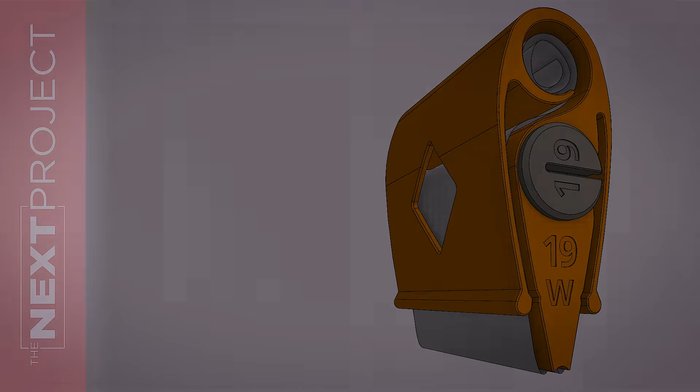This is yet another 3D print tool project. We are again revisiting the grip, which is a polish sanding grip for working on frets that are installed in the guitar or bass neck. This tool has gone through quite an evolution. I released the first version, which was, I believe, version 17.

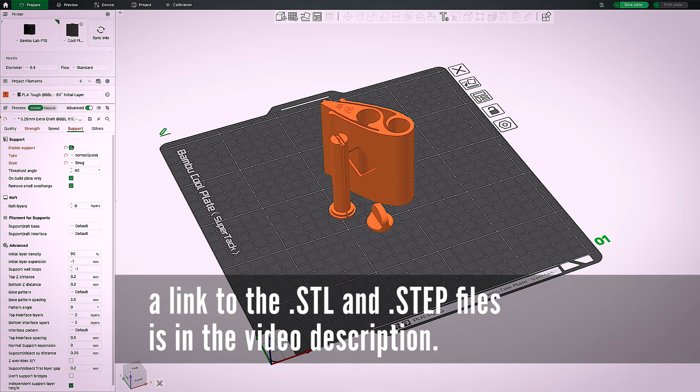It's been going through revisions and testing and a lot of use since then. A lot of people have downloaded it. I've got some very good feedback from the people that have been using it. I appreciate that. This is a group of files that I'm going to be sharing with you yet again.

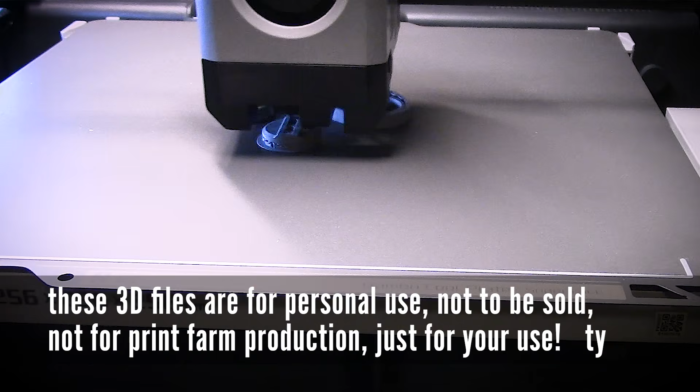This is version 19. I'm going to share a medium wide and extra wide housing version, which is the big bulky part we see getting printed there. There is also a reel or a spool, which is the tall narrow piece, and a thumb knob.

I'll be sharing these as STL and STEP files, and I've decided to also share the slicer code for this. You don't have to use that. You can create your own to fit whatever filament you may be using, but just so people who are new to this have a place to start, it will be in there.

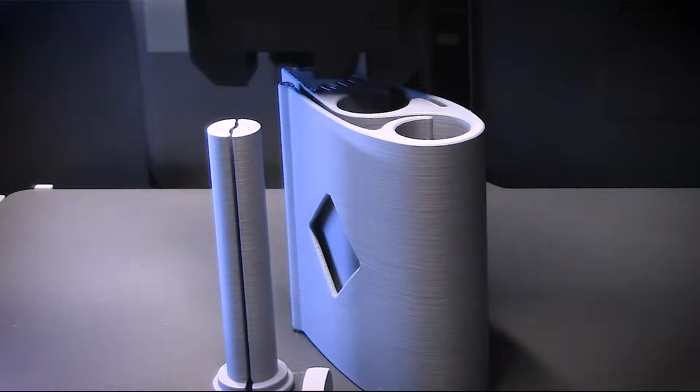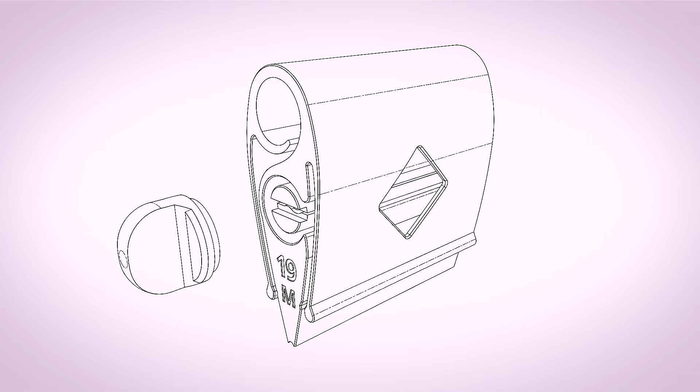Assembly is really pretty easy, just 3 pieces. I add a little bit of super glue to the thumb knob close to the center part where it keys into the spool. So put a little super glue on there, slide the spool through the housing, and then fit the thumb knob into the keyed part of the end of the spool, and squeeze it tightly together. You want the housing to be kind of stiff and snug on the spool assembly. That's it. Pretty easy.

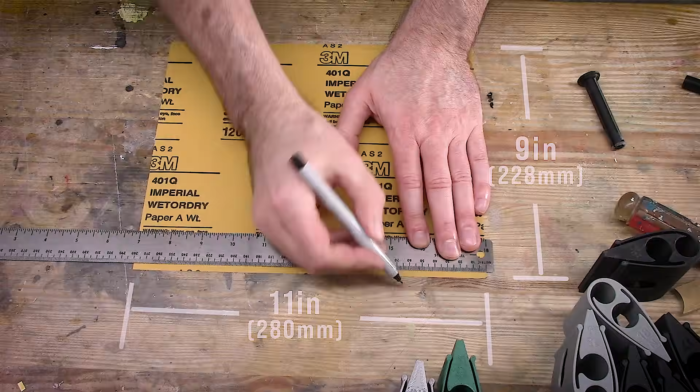Okay, so we're using some sanding pack paper, which is 9 inches by 11 inches, and divided that up using the metric system. I'm getting 5 slices that will work with this sanding grip, 56 millimeters wide each, which is like 2.2 inches roughly, by 9 inches long.

I roll it up with the grit facing in so the backing paper is out. And I fold a little tab about a 1/2 inch wide at one end of the roll that I've just made.

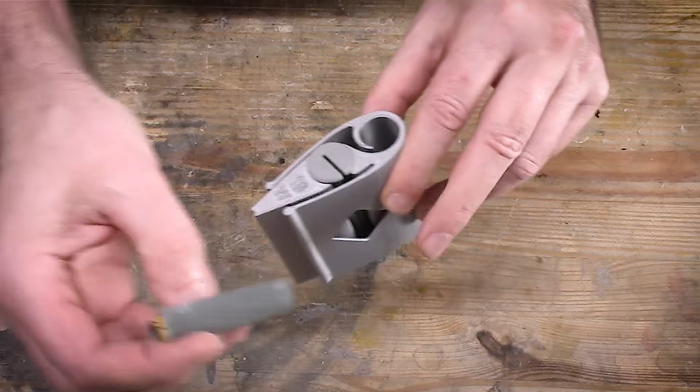So the process is, we take that little folded tab and slide it into the reel or spool, whichever you want to call it. Unroll part of the remainder of the rolled up sandpaper and tuck it into the feed part, the top hole in the housing there. And make sure the tab is tucked in nice into the slit in the spool.

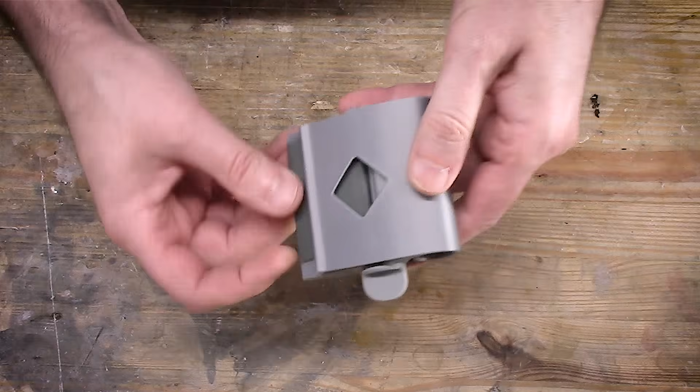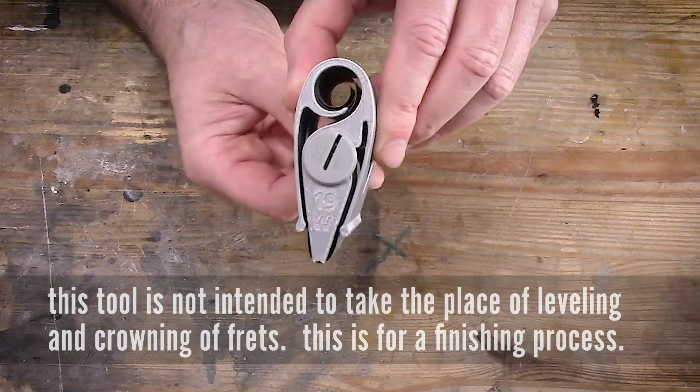And then you use the thumb knob to advance the paper onto the collection reel. That's about the magic of it. You are ready to polish sand some frets. Now, pay attention to which way you need to roll it because you can unroll that tab right out of there. So figure out how to twist it to pull the paper from the top supply roll down around the bottom sanding area and onto the collection reel.

When you're done with all your sanding, you just pull the paper out, reload and use your next grit. Another idea: if you have a little trouble keeping the paper stuck in the reel, try to fold the tab over to create kind of a V double fold at the very end before you slide it into the reel. This may give especially lighter grit sandpapers a little more grip within the reel.

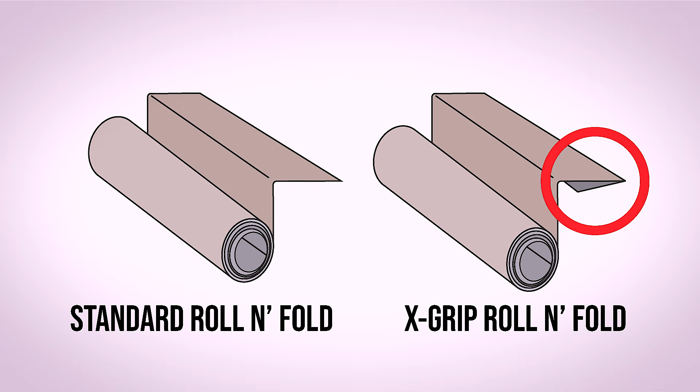This is another version of this. This has a different thumb hole. You see that has the oval holes where my thumb is right there. This is an older version. The new version has a diamond shape there, and that is to make printing easier. You will no longer need any support for the housing when printing.

The only place I use support is on the thumb knob, the little part that you grab on to twist the spool. I use a little bit of support at the very base of that because it does have an overhang. As you do some printing, you'll understand what that is.

And here we go. We've pulled a piece out. This was 1200 grit, and I'd already gone over the whole board with 800 grit before that. Some people have printed multiple copies of this and load each one with a different grit paper, so they can sand down the board, grab the next one, sand down the board, and do kind of a refining polishing that way.

And you could potentially call this a day. This is 1200 grit, and it's pretty nice. Or you could go to 1500, 2000 grit paper and call it a day. Or you can polish it afterwards.

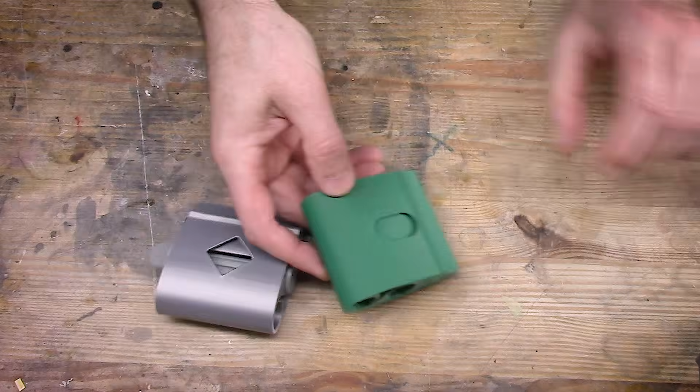Here we're taking a really quick look at a few of the prototype pieces that I've printed over the last 5 or 6 months. Going way back, I think there might be a version 1 in there somewhere, if I still have it. Otherwise, it's maybe version 2 or 3. I'm not sure anymore.